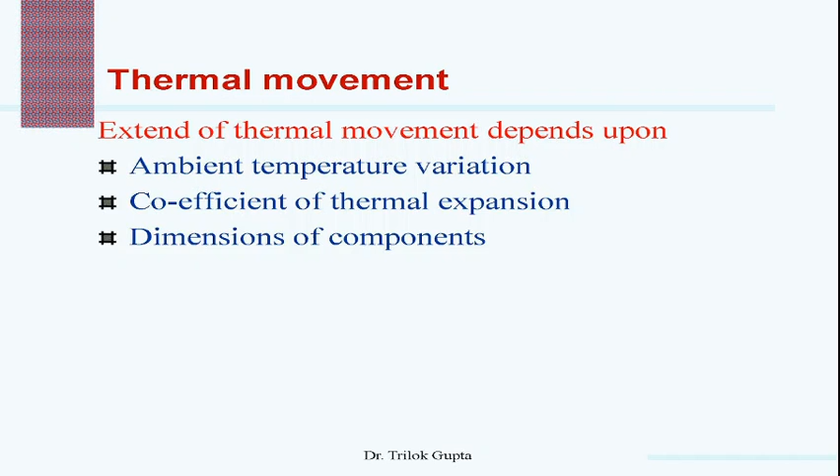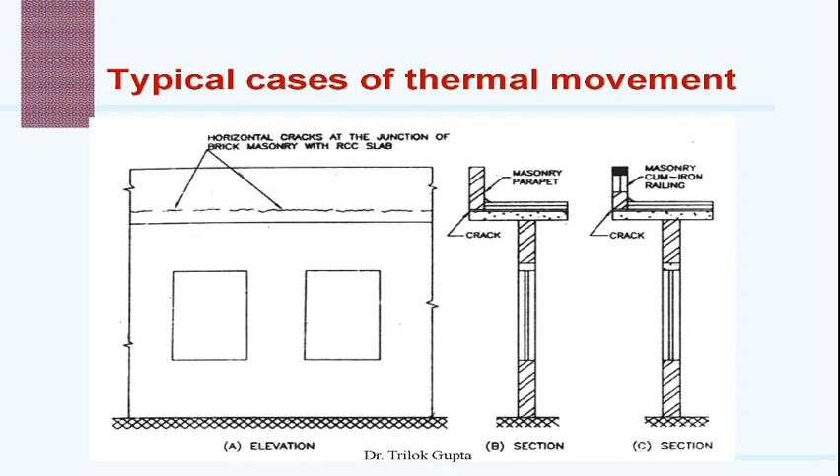So we are showing the typical cases of thermal movement. Basically, this figure shows horizontal cracks at the base of a brick masonry parapet which is supported on a projecting RCC slab. So this is the horizontal crack at the junction of the brick masonry with the RCC slab, and here this masonry parapet is outside the wall. So due to the thermal movement, this type of crack takes place.

Now this is another example, cracking in the cross walls. These are the cross walls of the topmost story of a load bearing structure, again due to thermal movement. This thermal movement takes place in the slabs, and due to this the cross walls are subjected to cracks.

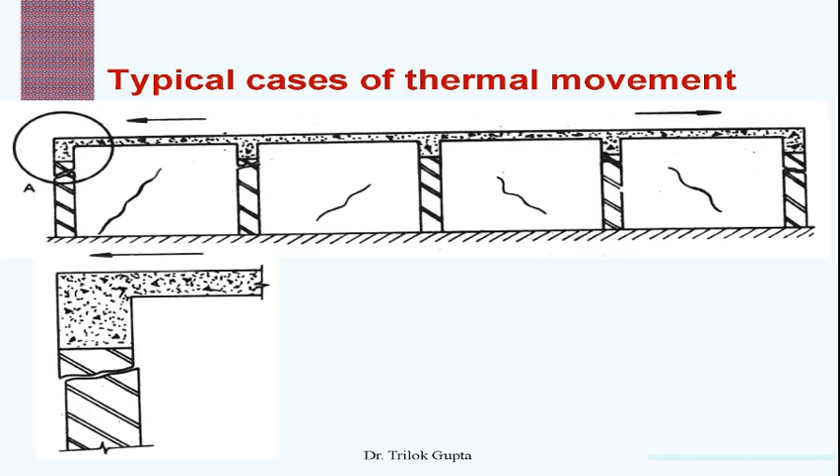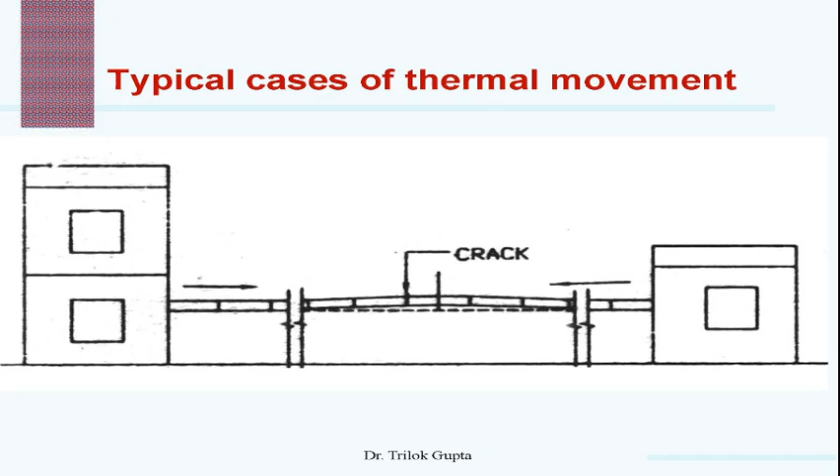Now this is another example of cracking. Here there is an arching up action, and there is cracking of the coping stone of a long garden wall. Basically, this is a boundary wall or garden wall. So this is a coping, and due to the change in temperature or thermal movement, this arching action takes place, and there will be cracks in this coping. So this is another example of thermal cracks due to thermal movement.

Now, elastic deformation. Structural components of a building undergo elastic deformation due to dead and superimposed live loads in accordance with Hooke's law. The amount of deformation depends upon the elastic modulus, the magnitude of loading, and the dimensions of the components.

And this elastic deformation under certain circumstances causes cracking in the building. There are three main circumstances. First is when walls are unevenly loaded, with wide variation in stresses in different parts; excessive shear stress is developed, which causes cracking in walls.

Next one is when the beam or slab of larger span undergoes excessive deflection and there is not much vertical load above the support, and the ends of the beam or slab curl up, causing cracks in supporting masonry.

And next is when two materials having widely different elastic properties are built side by side. Under the effect of load, shear stresses are set up at the interface of the two materials, resulting in cracks at the junction. Such a situation is commonly encountered in the construction of RCC framed structures and brick masonry panels or partitions, that is, the internal walls.

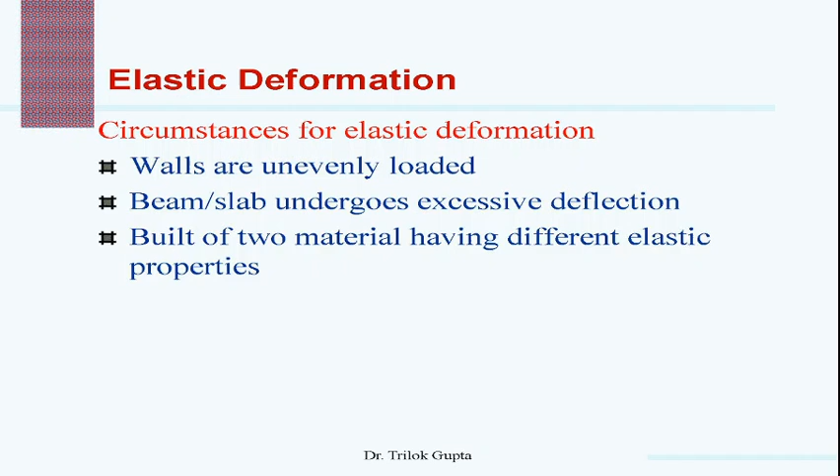So these are the typical cases. There are two cases of elastic deformation. The left figure shows diagonal cracks in the cross walls of multi-story bearing structures. That is due to the elastic deformation, because there will be excessive deflection.

And the other one shows vertical cracks in a multi-story load bearing structure having window openings. These are vertical cracks at the corner of the openings. So this is again due to the elastic deformation.

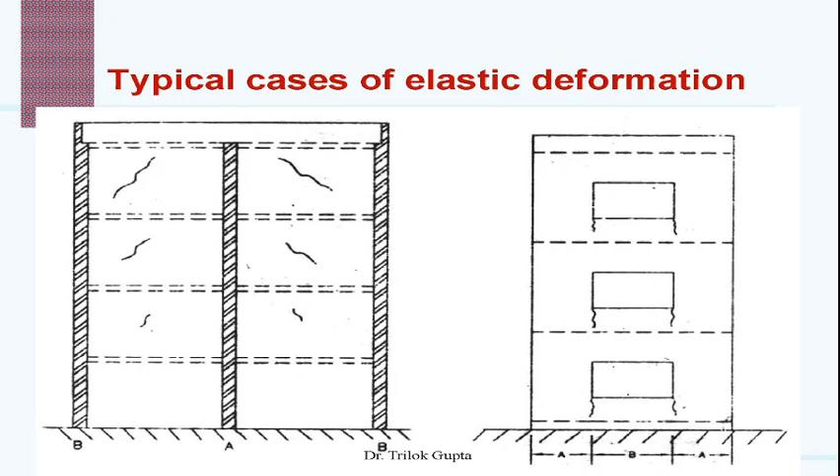So now next, creep. Normally when building materials such as concrete, brickwork, mortar, timber, etc. are subjected to sustained load, they not only undergo instant elastic deformation, but also undergo a gradual and slow time dependent deformation, known as creep, or sometimes called plastic strain. Basically, it is time dependent deformation due to the sustained load.

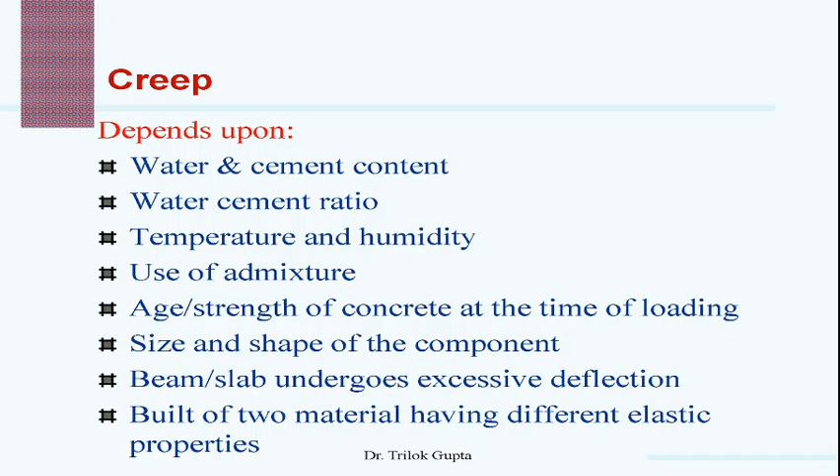In concrete, the extent of creep depends on the water and cement content, water cement ratio, temperature and humidity, use of admixtures, age or strength of concrete at the time of loading, and size and shape of the components. These two are not related; it is part of the previous slides.

So we can say that creep increases with water and cement content, water cement ratio and temperature. It decreases with the increase in humidity of the surroundings and the age or strength of the material at the time of loading. Use of admixtures and pozzolana in concrete also increases creep, and creep also increases with increase in surface to volume ratio of the components.

Now, movement due to chemical reactions. Certain chemical reactions in building materials result in appreciable increase in volume of the material, due to which internal stresses are set up, which may result in outward thrust and formation of cracks. The material involved in the reaction also becomes weak in strength.

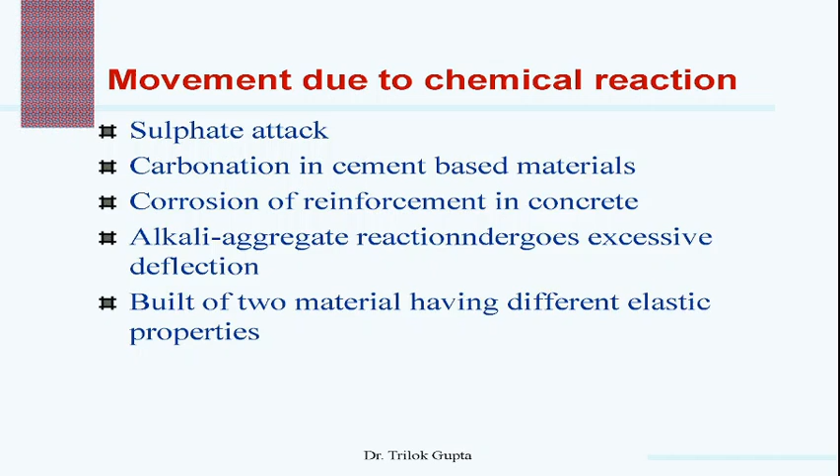The common instances of chemical reactions are sulfate attack, carbonation in cement based materials, corrosion of reinforcement in concrete, and alkali aggregate reaction. So now, sulfate attack. What is sulfate attack?

Soluble sulfates, which are sometimes present in soil, groundwater or clay bricks, react with the tricalcium aluminate content of cement and hydraulic lime in the presence of moisture and form products which occupy a much larger volume than the original constituents. This expansive reaction causes weakening of masonry, concrete and plaster and formation of cracks, and for this reaction it is necessary that soluble sulfate, tricalcium aluminate and moisture all three are present.

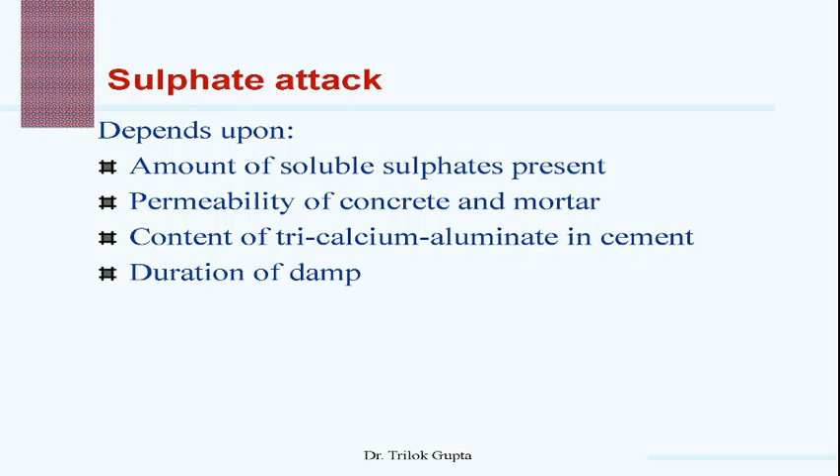The severity of sulfate attack depends on the amount of soluble sulfates present, permeability of concrete and mortar, content of tricalcium aluminate in cement used for concrete and mortar, and duration for which the building components remain damp.

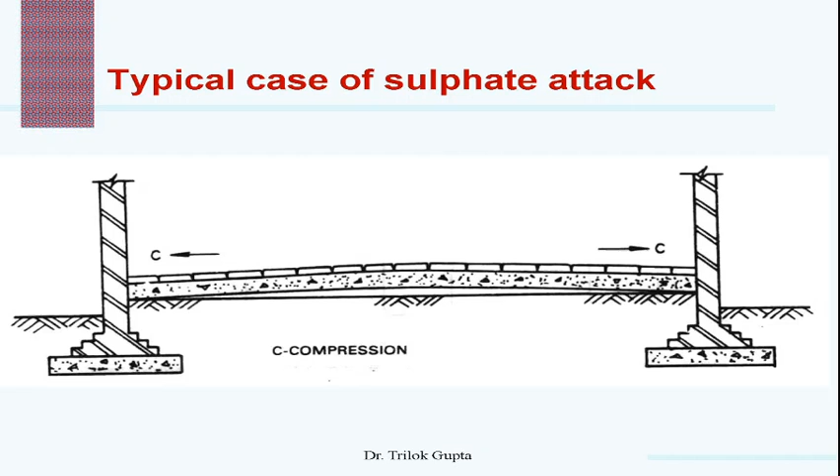Now, next one is carbonation. Basically, during hardening of concrete, some calcium hydroxide, Ca(OH)2, is liberated in the process of hydration of cement, and it provides a protective layer surrounding the reinforcement bars. This calcium hydroxide reacts with free CO2, carbon dioxide, and forms calcium carbonate and H2O, and that is responsible for lowering the pH of the concrete.

Generally the pH of concrete is more than 12, but due to this reaction there will be a lowering in the pH of the concrete, and that will be responsible for the destruction of the passive layer that is formed during the hydration process of the cement. Carbonation is basically confined mainly to the surface layer, and depth of carbonation should not normally exceed 20 mm in the 50-year span of the structure.

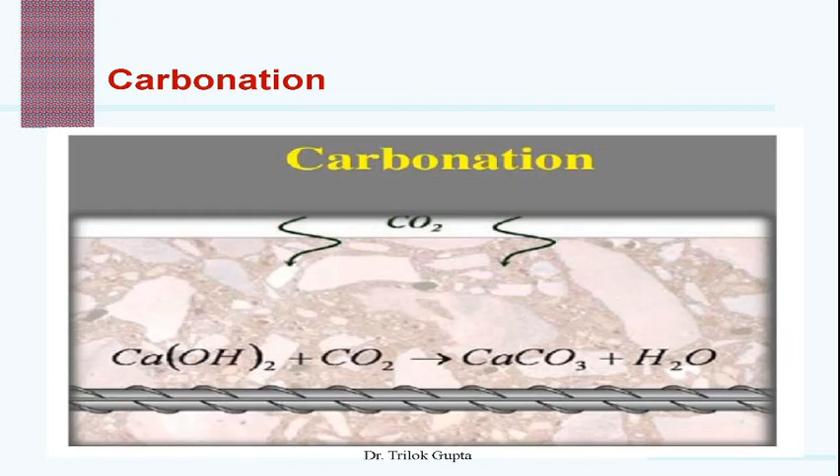In porous concrete, it may reach up to 100 mm in 50 years. The effect of carbonation is more severe in industrial localities having a higher percentage of carbon dioxide in the atmosphere. So this is again responsible for cracking in the concrete. Now, corrosion of reinforcement bars in concrete is also responsible for cracks in the structure.

Normally concrete provides good protection to steel reinforcement embedded in it. The protective quality of concrete depends upon high alkalinity and relatively high electrical resistivity of concrete. Extent of protection depends upon the quality of concrete, depth of concrete cover, and the workmanship. However, when the reinforcement steel gets corroded, it increases in volume, setting up internal stresses in the concrete. In course of time, it first causes cracks in line with the direction of the reinforcement, later causing spalling of the concrete.

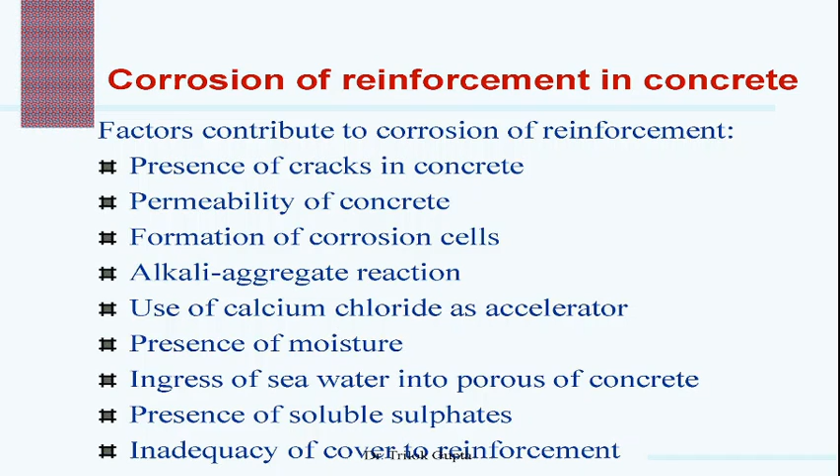Factors which contribute to corrosion of reinforcement in concrete are the presence of cracks in the concrete, permeability of concrete, formation of the corrosion cell, alkali aggregate reactions, use of calcium chloride as accelerator, presence of moisture, ingress of seawater into pores of concrete, presence of soluble sulfate, and inadequacy of cover to reinforcement. These we will discuss in a separate video exclusively for the corrosion of reinforcement bars in concrete.

Next is the alkali aggregate reaction. In OPC, sodium oxide and potassium oxide are present to some extent. These alkalis chemically react with certain siliceous minerals constituting the aggregate and cause expansion, cracking and disintegration of concrete. In RCC members, it also causes corrosion of reinforcement. Cracking due to this reaction is usually of a map pattern, and the reaction being very slow, it takes a number of years for cracks to develop.

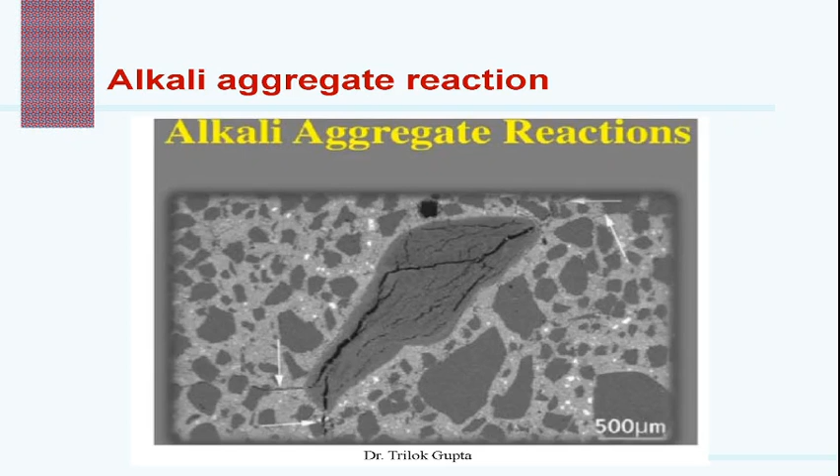Here we can observe the concrete, the aggregate, the fine aggregate and cement paste, and there is some sodium oxide or potassium oxide, and that will expand with the passage of time, and there will be cracking, and that will be responsible for cracking in the structure of concrete. That is called the alkali aggregate reaction.

I have used the IS SP 25 1984 handbook on causes and prevention of cracks in buildings to make this video. I am very thankful to the Bureau of Indian Standards for providing such information in SP 25.